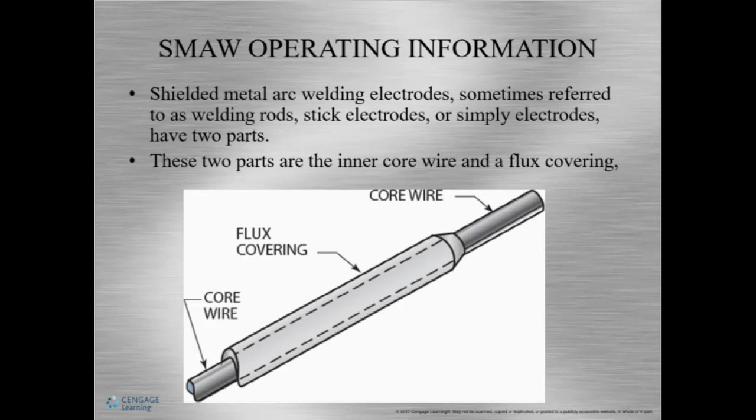So what does an SMAW electrode actually do? Well, first, it carries the current. Anytime you see the word electrode when it's used in welding, we're talking about something that's carrying the welding current. In most cases, like in SMAW, the electrode melts and it's used as a filler metal and makes the finished weld. The other part of the electrode, the flux, provides alloying elements.

Alloying elements, remember, means to add elements to make the weld better. So arc stabilizers are usually included in the flux. Also, the flux can help bring impurities into the slag and create a slag to protect the weld bead while allowing it to cool down slowly. Flux also provides a shielding gas during welding to protect the weld from the atmosphere. So these rods are actually doing a lot of work for you, which is super cool once you guys understand the science.

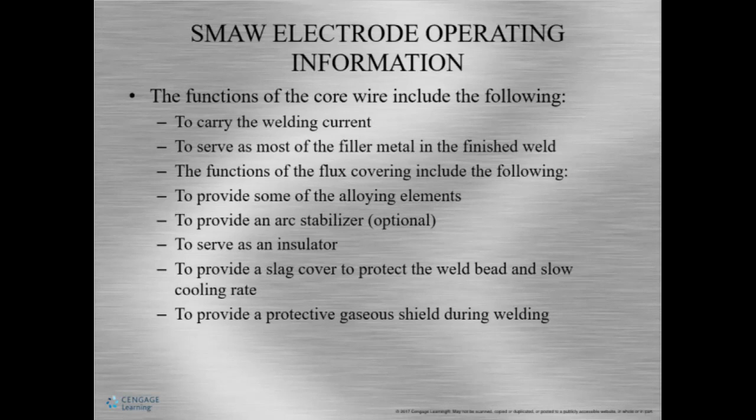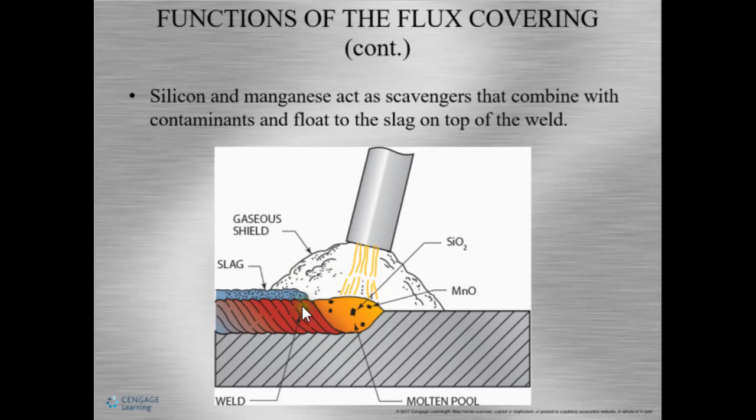All right, so we talked a little bit about silicon and manganese earlier. So here we have how they work as scavengers taking out the contaminant. So here it is. Here we are. Let me help you take it out and help you put it into the slag.

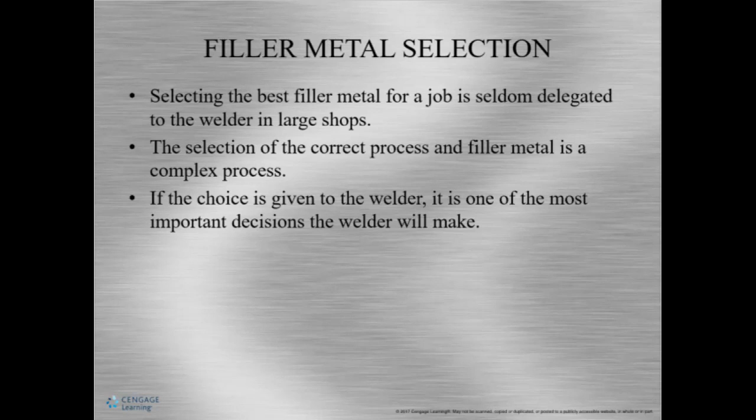So selecting an electrode can be a really big task. As an entry-level welder or even a seasoned welder at larger shops, you're rarely going to have to choose the right electrode, but there will be times in your career as a welder or as an independent contractor when you need to make that choice and you need to understand how to do it.

So there are a ton of variables and conditions that you might need to think about before you select an electrode. Some of the most common ones, like current and power source, regardless of the type of welding, are important. You have to have a machine that uses the type of current and power source that the electrode needs to work properly. The type of base metal and thickness also play a part in what to select, just as much as joint design, surface condition, service use, and so on.

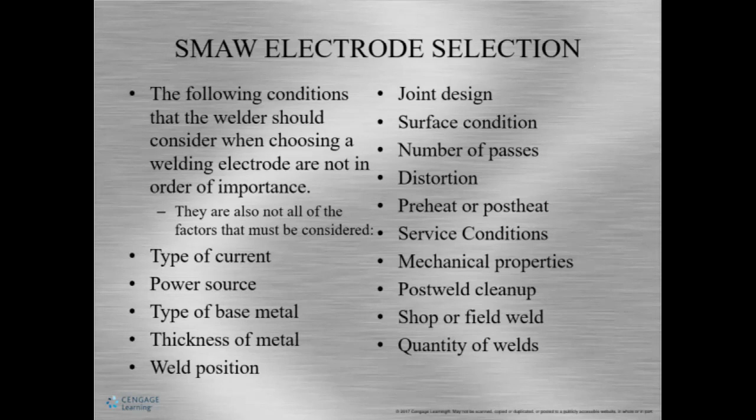So let's go over some basic rules that help us pick what we're looking for. All right, so here I have a couple of rules that I worked with during my welding career, and I hope maybe this can help you too.

All right, so rule number 1, match your filler metal with your base metal. Okay, this means if I have a steel base metal, I want to use a steel filler metal. If I have aluminum base metal, I want to use an aluminum filler metal.

Pretty good, right? Okay. Rule number 2, the filler metal should be as strong or stronger than the base metal. Well, what does that mean? Well, it means that you need to match the tensile strength of the base metal with your filler metal, okay? Your weld should outlast your base metal. We want to show people that we have a super weld and their base metal was garbage.

All right, rule number 3. 90% of your decisions are going to be based on thickness of material. Your settings are based on how thick the material is. The base metal might also dictate the edge preparation that you may need. And you may have a choice of filler metals. One could be shallow penetrating and the other deeper penetrating with some of the same characteristics. So if your metal is a thinner metal, you may not want a deep penetrating rod. So that helps also with selecting the correct rod.

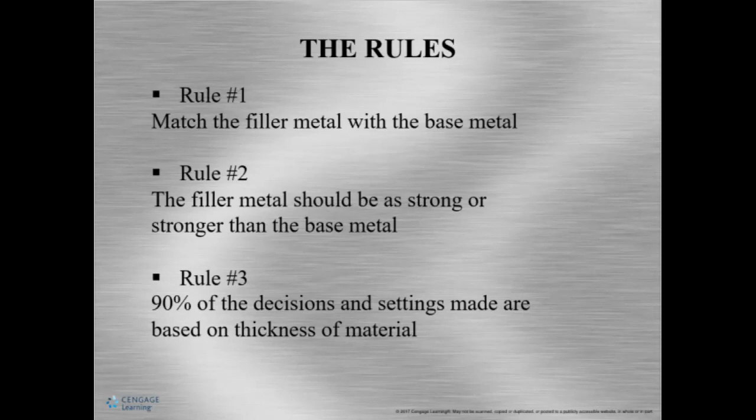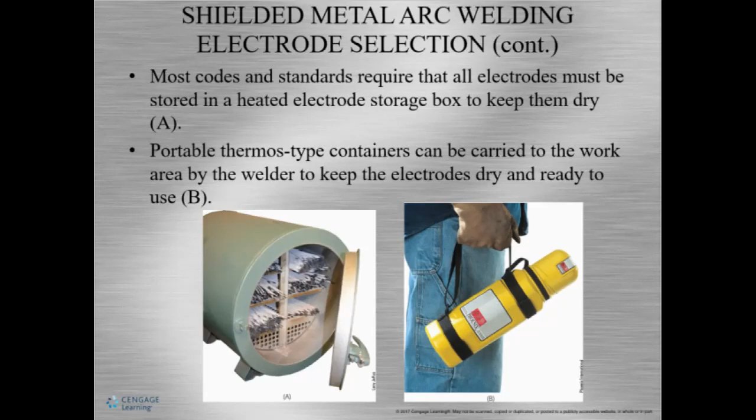So the monkeys in the container are the classifications. Each monkey has his own name, like Luke or Skywalker or Leia or whoever. We can now name it. So a classification is a name of a rod, like E6010 or E7018. So we can see that the barrel of monkeys and the names of monkeys are just like my specifications and classifications. We can also notice that it's a specification because it has a speck in it. It has a dot in it. We're specifying it's under this roof, but we need to be more particular with a classification.

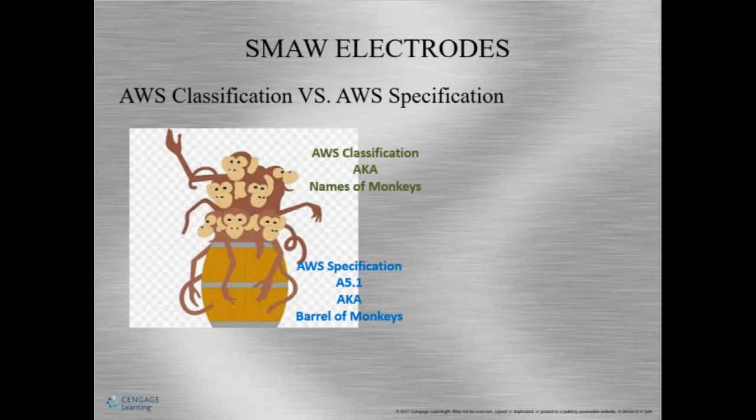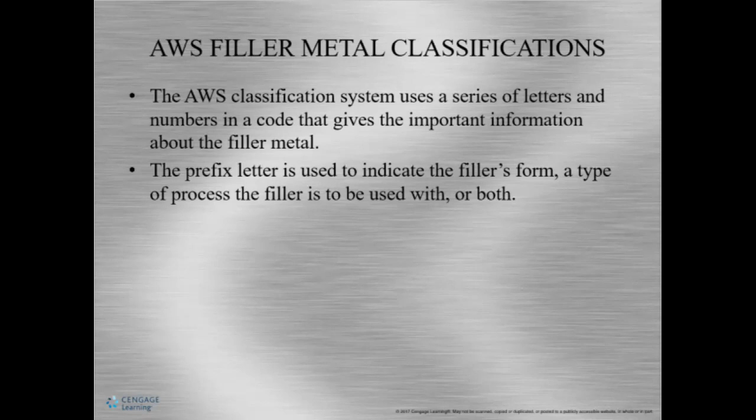All right, so we're going to talk about AWS filler metal classifications. So we're talking about particular rods. This goes for many different processes. So here we go. The prefix letter, or the letter that is first, tells us the form or type of filler metal that's going to be used, or how it comes in. Does it come in a rod, or is it just an electrode? Remember that not all of this is seen on a daily basis, so unless you use some of the particular processes, you might not see it, okay?

So here it is. Here's our prefix letters, meaning the first letter before all of the numbers. E indicates that this filler metal is an electrode. So we know that an electrode carries electricity. You will see this in GMAW, FCAW, SAW, and ESW. All right, R indicates a rod. Rods are usually cut to length or can be a wire roll.

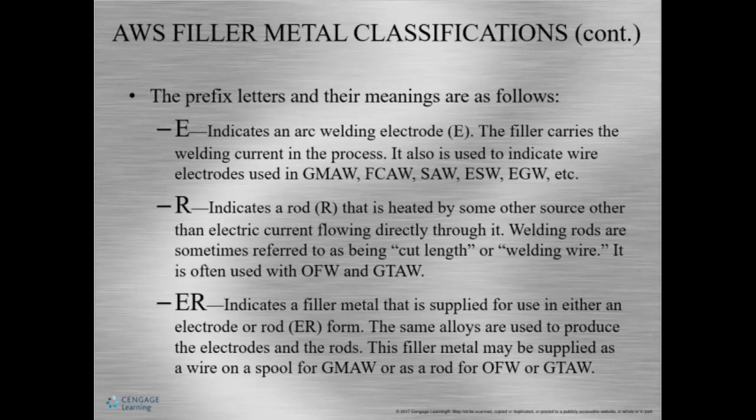ER indicates that it can be used as an electrode and a rod, either or, okay? So the same alloys are used to produce the electrodes and the rods. It just might be supplied on a wire spool for GMAW or as a rod for GTAW.

All right, EC. You probably won't see this very often, but this indicates it's a composite. And this is usually used for SAW, or submerged arc welding, and no, this is not underwater welding. B, this indicates this is a brazing filler metal. Brazing fillers can also come as powders, sheets, washers, rings, just about anything, okay?

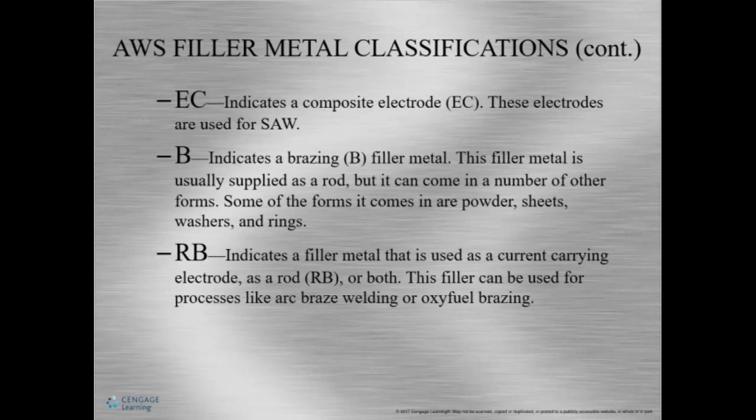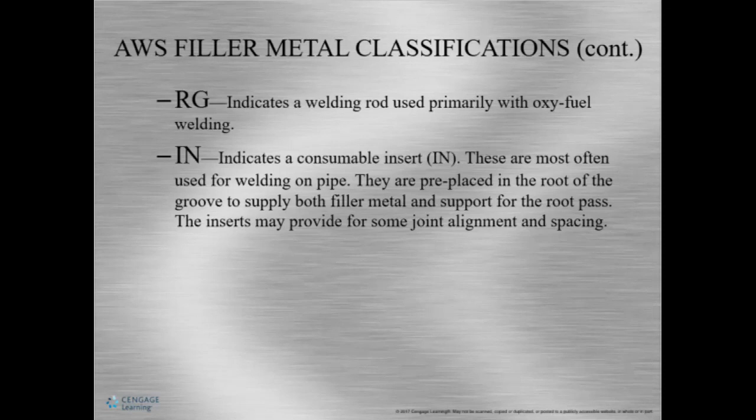RB, this tells us the filler can carry current or be used as a rod or both. So this is usually used for braze welding or oxy-fuel brazing. RG, this type of rod is usually used with oxy-fuel welding. IN, this is a consumable insert, meaning that it is used as a backing, like in a root pass, and it actually gets made into the weld without being removed, like some types of backing strips.

EW. EW says this is not consumable. This is a non-consumable electrode, meaning that it's not going to be used during the welding process and get made into it. The E tells us it's carrying current. The W is the chemical symbol for tungsten. And this is going to be used for GTAW.

Okay, here we go. Couple of others. Keep them going, right? F. This tells that the flux is used for submerged arc welding. So remember, this is not underwater welding, but a process kind of like FCAW with more fluxing agents. So there are alloys in the flux that dissolve into the weld metal. So the filler metal and the flux actually have to be specified together. The filler metal is identified and then the flux is identified.

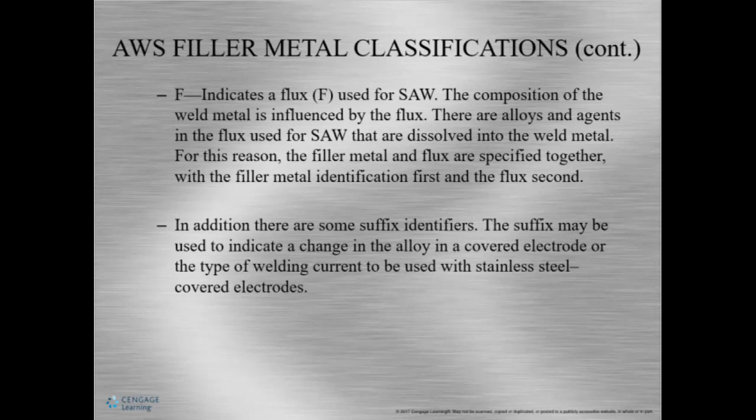So there are some things called suffix identifiers. Okay? Suffix means at the end. So this can indicate how much hydrogen is in a particular filler metal. All right. The specification for carbon steel covered electrodes for SMAW is AWS A5.1. The specification for low alloy steel SMAW electrodes is AWS A5.5. Okay, you can remember that because there's a spec in it, or a point, and remember this specification, this is the barrel, this holds everything.

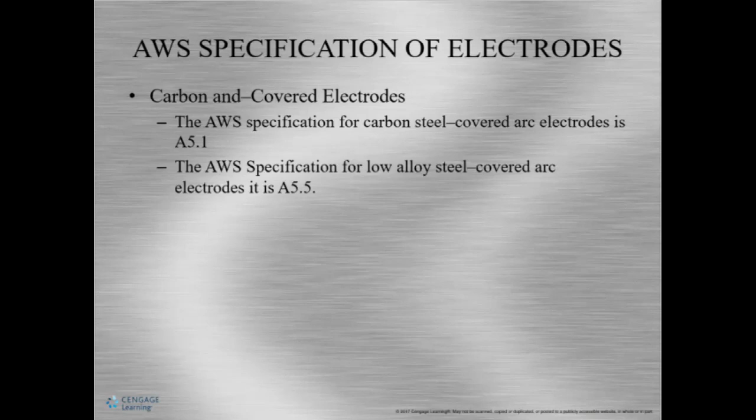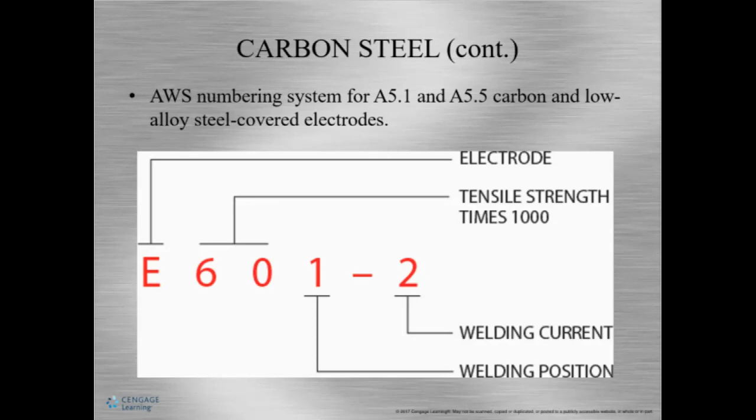All right, the last digit. The last digit tells us the polarity or the welding current and the composition of the flux. So we can see here the last digit and the current required to run the electrode, as well as what type of coating or flux it is. So this is kind of cool. So we know that the type of coating and current is on the end, this last digit here. If it's 0, it is high cellulose sodium, and it must be run on DC+.